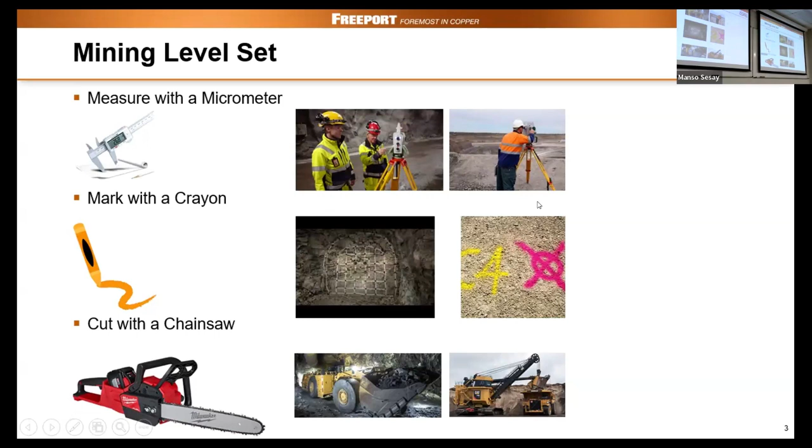In mining, we measure with the micrometer, we mark with the crayon, we cut with the chainsaw. It's very true, but it's really interesting because looking back on it, some of him sharing that with me was a little bit of his frustration, right? We go out in the field, there's such precision in what we do, and then you turn around and see this huge shovel just basically plowing through, and there's really not a whole lot of precision to that.

So fast forward to where we're at today. I think it's important to highlight that mining is actually coming from a position of strength today. We've come a long way, right? Our mines are safer, more productive, more cost efficient. When you think about the relationship with the workforce, we have as good a relationship with the workforce as we ever have before. The level of engagement and collaboration is at its highest level that we've seen. So certainly for us at Freeport, we lean a lot on our workforce to help us solve some of the issues and challenges that we have.

Moving on, when you think about technology, you've heard the old adage around work smarter, not harder. But there's a lot of technology that we deploy in the field. And when you think about decarbonization going forward, we're going to be relying pretty heavily on technology.

And then along the way, even environmental stewardship. So now when you think about these key priorities of safety, environmental, cost, production, now we're layering in this whole decarbonization, and I'll get into some of that detail with all of you.

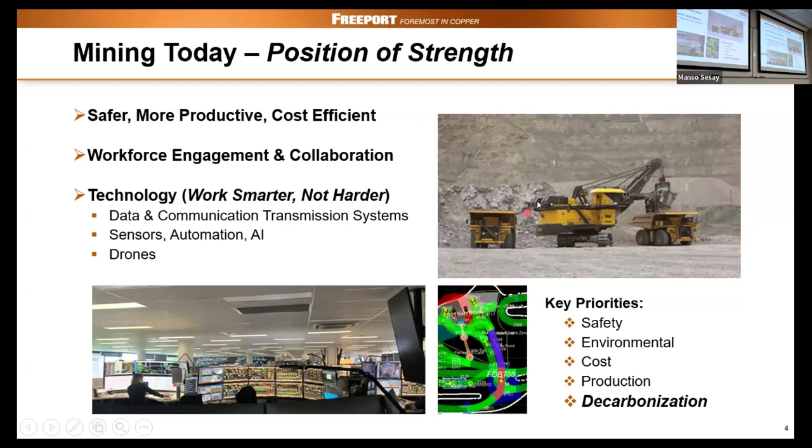The group that I work in within Freeport is called Sustainable Mining. We've all heard the word sustainable, it has a lot of meanings. Certainly for us, it's beyond even just decarbonization. Sustainability is, for us, how do we sustain our mine plan? How do we sustain our assets? How do we sustain the workforce? It's really, really key to our business, and certainly for other companies as well.

I wanted to highlight here, when you think about sustainability, this is our Miami mine. Back in 1993, we purchased this 4100 shovel. It went through a life cycle. We rebuilt it, redeployed it to our Morenci mine. It's been operating at Morenci, and then in late 2023, we actually rebuilt it again. So we have a shovel that's on its third life, basically running 250,000 hours. Rather than replace the assets, we actually have a pretty good program where we rebuild those assets to basically brand new. We've done a lot of activities since 2006.

This is a key part of our business, it's part of our cost profile. Rather than spend $30 million on a brand new shovel, you can rebuild it for half the price. It actually operates and is reliable, just as good as new.

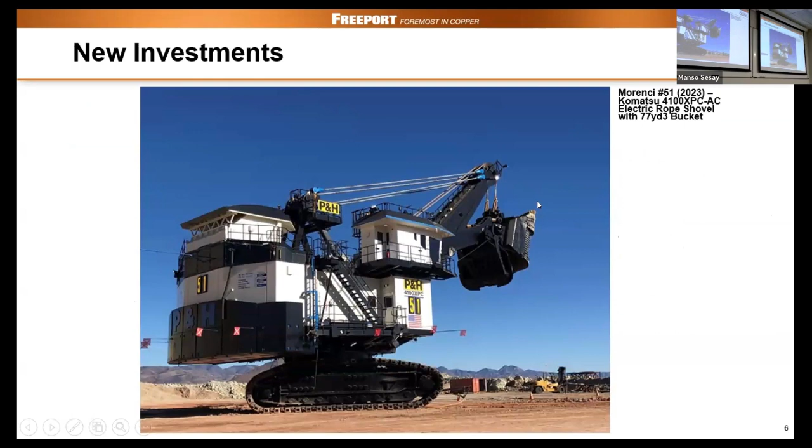And at the same time, we're also making new investments. This is actually our latest addition, a brand new 4100 XPC AC shovel to the Morenci mine. So it's not all about rebuilding assets, we're also bringing in new assets as well.

But you also have what they call scope 2, and scope 2 is you bring in electricity into the operation. You've got to run your mills, you've got to run other facilities. Where does that electricity come from? Is it renewable? Is it non-renewable? Non-renewable electricity, of course, can create greenhouse gas emissions. It's no different than the diesel consumption producing greenhouse gas emissions. You can have non-renewable coming from coal, gas.

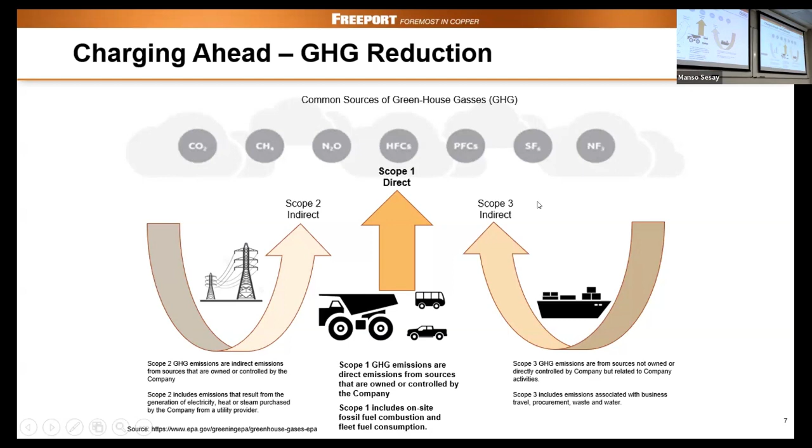An example of renewable would be solar, windmills, etc. This one over here, scope 3, is actually more on the supply chain side, further down the road, and that's something the industry is pulling together as we speak. I wanted to give you some context on what scope 1, 2, and 3 is, but I'm going to focus on the one here in the middle.

For Freeport, we've actually set some targets. One of the things I wanted to go over is how we measure our greenhouse gas reduction, in terms of copper intensity. Copper intensity is a measurement of how many metric tons of CO2 you're producing, divided by how many metric tons, in our case, copper that we're producing. So basically for every metric ton of copper, how much CO2 are we creating? This is referred to as copper intensity.

If you look at Freeport Indonesia, they actually have a separate target of 30%. But by 2050, as a company, we plan to be net zero on our greenhouse gas emissions.

We call that an aspirational goal, and the reason why that's aspirational is a lot of the technologies don't yet exist. And if they do exist, they're not yet scaled for our application.

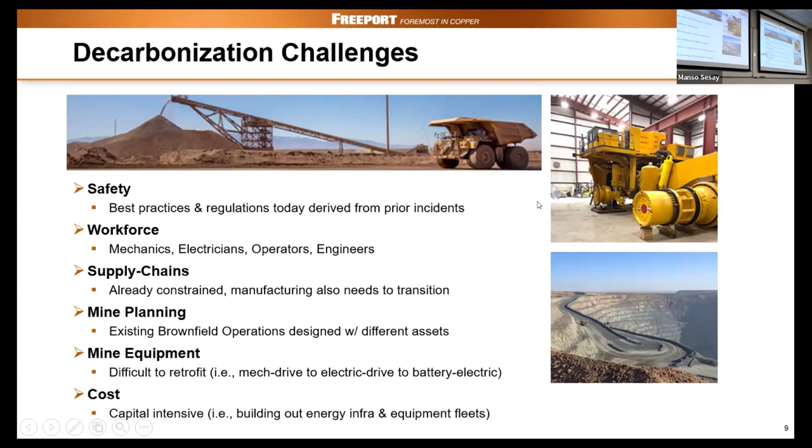When I showed you this previous slide, our business model today is all about taking these existing assets and we keep rebuilding them. So a $5 million truck brand new, I run about 500 of them. I'm going to rebuild them for 2.5 million, cycle after cycle after cycle.

Well, if I can't retrofit those trucks, in the future those 500 trucks need to be converted to the next generation haulage truck. So take 500 trucks times $10 million - just haulage alone, that's a $5 billion investment just in the haul trucks alone. That doesn't include all the enabling technology that goes with it.

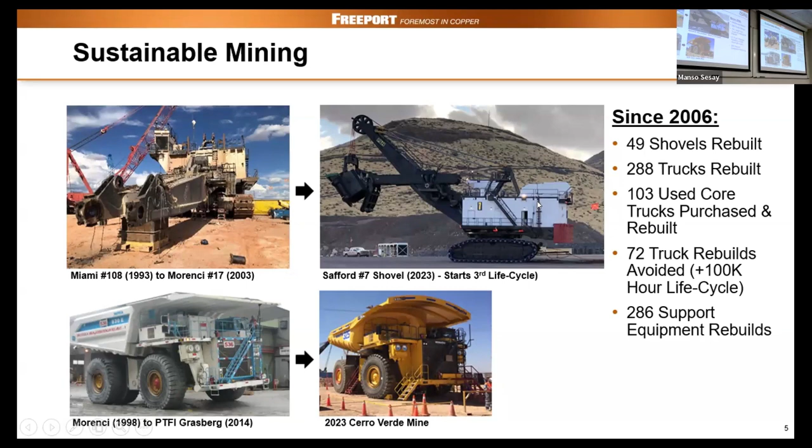So this is part of what I'm sharing, is that it's highly disruptive. Again, it's the right thing to do, but it's highly disruptive. And so when you think about just general business, you're sustaining the business, you have to reinvest in the business.

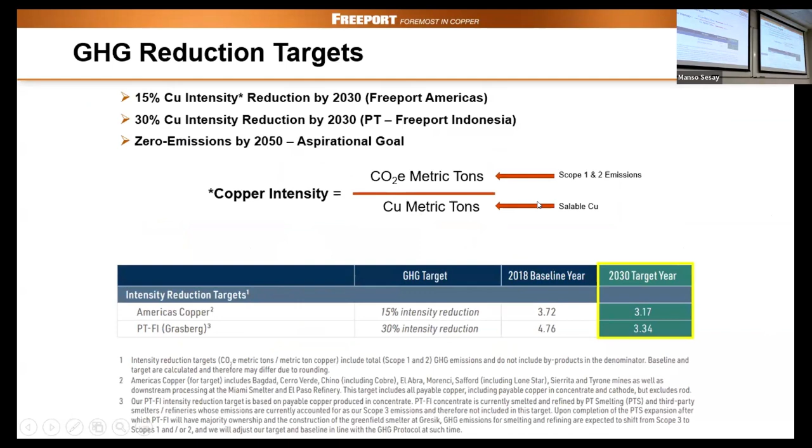There's a lot of work that goes into tailings dam management. As pits get deeper, more mature, those ore bodies get mined out, you have to invest in new projects. So everybody's competing for this capital. And now with this decarbonization, we have this new competitor for capital.

So another area I want to highlight, this is part of the challenges. When you think about copper, of course, copper is really important to us. That's our primary focus, and we're excited about the green transition. Copper is going to benefit immensely from this transition.

But when you think about where we stand today, these figures are based on an IEA study from back in 2021. We're roughly at 25 million metric tons of copper production per year today. The projection, and again this is independent, is that by the year 2035, you're going to need double the copper production that's being produced today.

So this is going to pose some really big challenges for society as a whole, but certainly as a mine operator. We're trying to spend money reinvesting in a new fleet of haul trucks that are zero emission, but at the same time I'm competing because I also need to reinvest in expanding my existing operations, exploration, developing new projects. So there's a lot going on. It's not just a Freeport issue, it's actually an industry-wide issue. I'm talking about copper here, but copper is no different than all the other commodities out there.

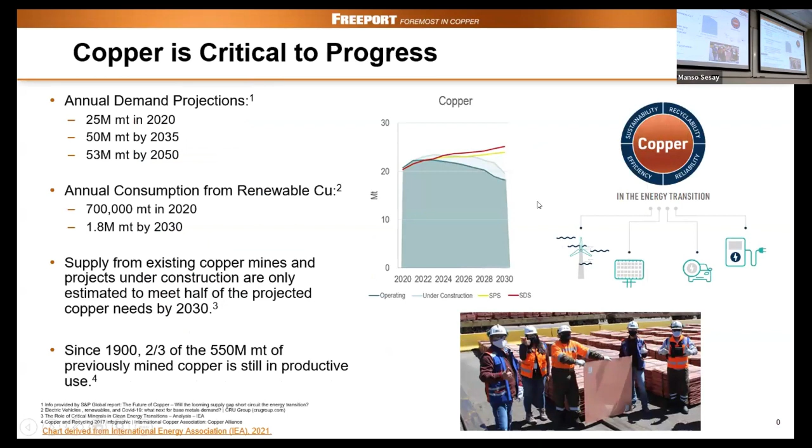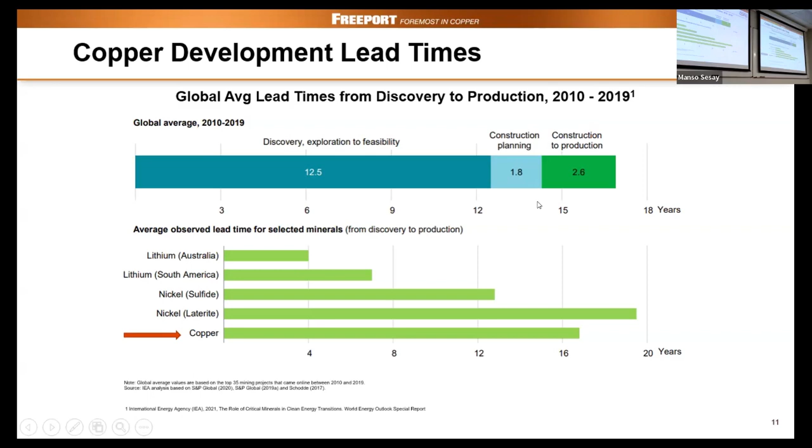And I think that's worth noting. Again, it's not just about copper, but just think about the demand now on lithium and nickel and cobalt. The list goes on.

So what we're trying to do now is, if I have a net zero truck and I'm not using diesel, I'm going to be loaded at the shovel. That's where you hear a lot about battery - if I have a battery that can allow that truck to operate, that's what we want to do, around the battery propulsion. Then you hear a lot more about trolley assist - how can I propel the machine while at the same time recharging that battery? And then there's times when I'm not exposed to dynamic energy transfer, which is what trolley is, and now I'm back to using my battery again.

Cases where you have a downhill haul, like today's trucks, there's all this regenerative energy, and they end up blowing that energy off - they dissipate it from the truck. So now it's like, well, maybe we can take that energy and put it back into the battery. So really what we're trying to solve is, how do I take an existing haul truck today that I'm basically just running these cycles, the mining cycle, and now I don't have diesel, but I've got to keep those trucks running. That's when you think about these enabling technologies - the technologies of the battery, technologies of the dynamic energy transfer, leveraging regenerative opportunities.

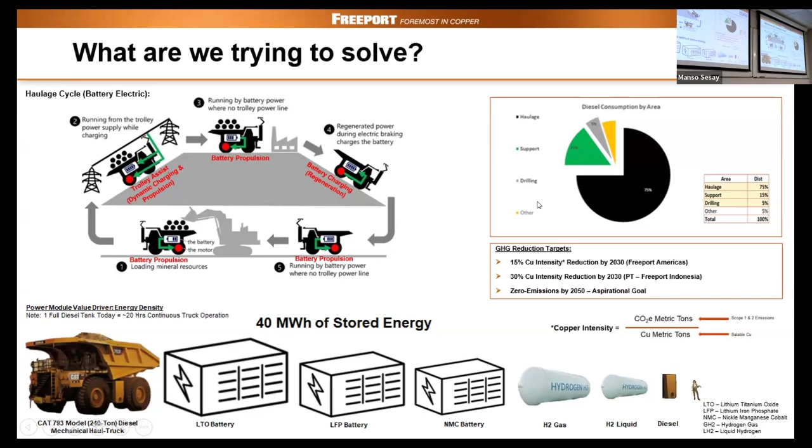So you go through these different areas like, okay, will these actually lower my scope 1 emissions? Yep, they all will lower your scope 1 emissions. Certainly there's some zero emission solutions over here.

Availability at scale. So a haul truck, if you want to run a haul truck today for a 24-hour period, you need 1,000 kilograms of hydrogen. So if I have a fleet of 50 trucks, I need 50,000 kilograms of hydrogen per day to run a fleet of 50 trucks at a mine. I have 500 trucks. Where am I going to get 500,000 kilograms of hydrogen? It doesn't exist. And we're just Freeport.

Throw in the Newmonts, right? Throw in the BHPs, the Rios, FMGs. So the supply is not there. So you can kind of go down here. There's obviously cost impacts. Again, mechanical drive. Those components are not configurable to actually running trolley assist, battery, and hydrogen fuel cell.

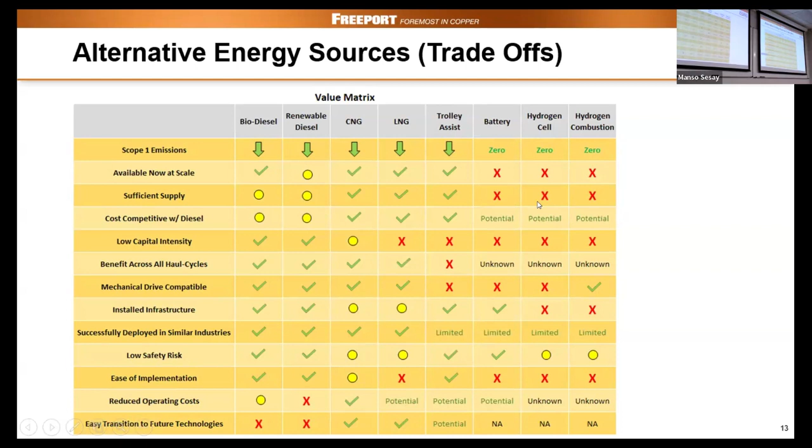So yeah, so these are just some of the exercises that we've gone through as a company. Because one of the things I will say is, every company is a little different, but one of the first things you need to do is really understand what's your profile.

And then you think about hydrogen, you're going from wire to gas, back to wire. So that same 100% renewable electricity, when you go through all the conversion, you have the losses across, you're only actually 22% efficient.

Depending on how you produce your hydrogen, a common way is through electrolysis. We operate in the southwestern US, where water is kind of scarce. So if we're going to set up hydrogen production plants, where are we going to get the water?

And on top of that, I need all this energy, and I need a lot of it, because at the end I'm only going to get 22% efficiency out of producing that. So part of this is explaining the complexities of what's going on, what we're trying to solve, and how we get there. But the laws of thermodynamics don't lie. They are what they are. We'll see how that progresses going forward.

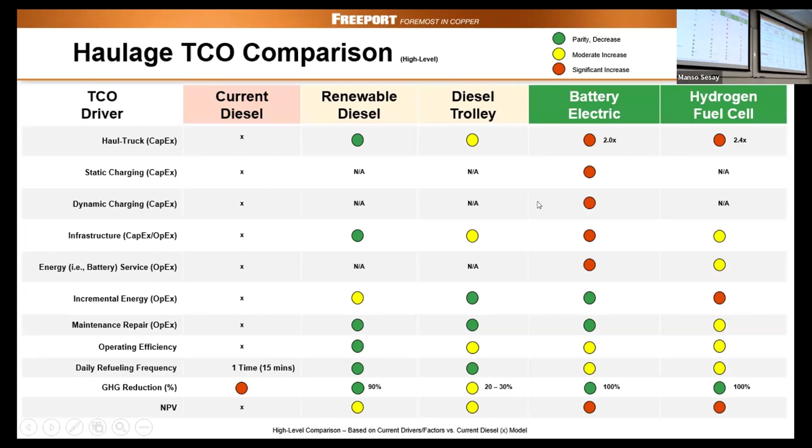So I've talked about this, current mine profile versus future mine profile. There's definitely a really good exercise around strengths and weaknesses. I mentioned earlier, we're a shovel and truck company. Our mindset, my training in mine engineering, has been around shovels and trucks. I'm very comfortable with shovels and trucks. But that may not be the solution in the future. When you think about a weakness for Freeport, we've got a bunch of mine engineers who are all truck and shovel guys. And the reality is we've got to shift away from that.

You hear the references around trying to put a square peg in a circular hole, or vice versa. It's not one size fits all. There's not going to be any kind of silver bullet. A lot of what we talk about in our business is beware of the shiny objects. When we started down this path a couple of years ago, you had a channel of solutions about this wide, and everybody had all these great ideas. Well, two years later, a lot of those ideas have fallen off because they just weren't feasible or the timing wasn't there. That channel's gotten a lot smaller. But it's really easy when you get these channels of all these ideas to get distracted. That's what we mean about avoiding the shiny objects.

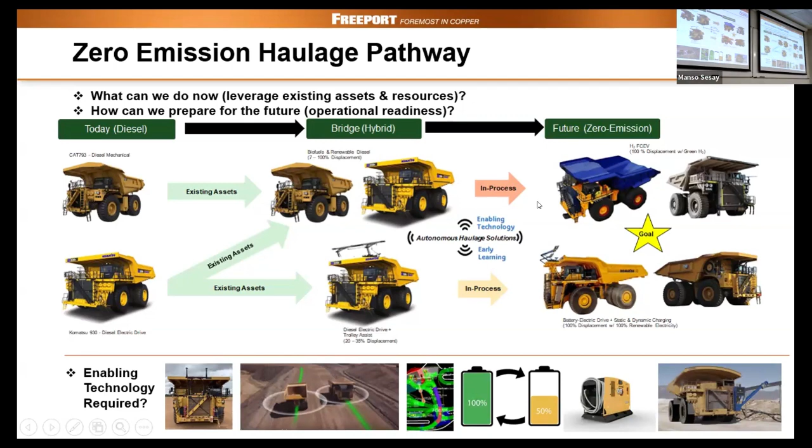I won't get into a lot of detail here, but if you take the information on the last few slides, you figure out, okay, this pathway we're on from where we're at today to the future. We've got our 2030 target, you have your 2050 net zero. What are some of the things we can do?

We actually have projects around static and dynamic charging. There's a lot of collaboration going on—I'll talk about that in a second with Cat and Komatsu specifically. Again, that's around how we prepare for the future.

We actually have a separate power group within the company that's working on how we take non-renewable electricity and convert it to renewable—so move away from gas, coal, over to wind, solar, nuclear. And this scope 3 is actually under development as an industry; they haven't quite tackled that yet.

So this is really where the priorities are. But this gives you an idea, as a company, for myself and my team, these are the activities we're involved in right now. Again, what can I do with existing assets and how can I prepare for the future? So focusing on the things you can do and the things you can control.

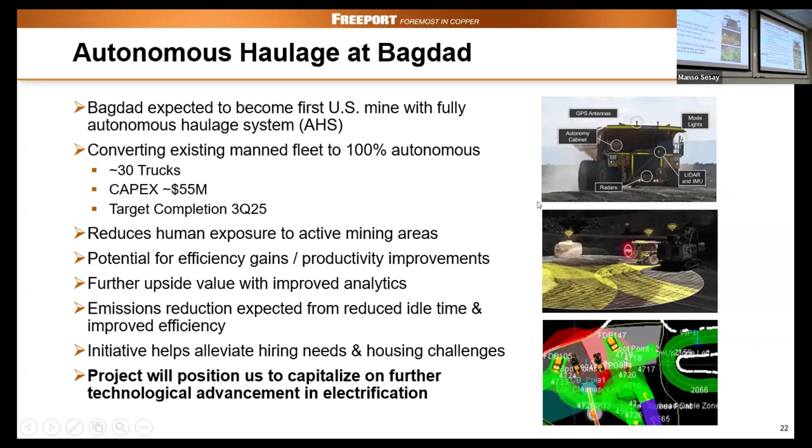And so that's based on today. But this is actually now going to become a blueprint, because in the future, when we're running a battery electric truck like this one here, in order to keep this truck moving 100% of the time, how big of a battery system do we put on that truck? And that battery is only going to last so long because I still got to carry 240 tons of material. And I'll just tell you guys, the batteries for these trucks are in the 15 to 20 ton range.

So if I'm putting 15, 20 tons on that truck, ideally, I can't have 240 tons. Maybe it's going to have to drop to 225 or 220. Now, remember when I said you might have a fleet of 50 trucks and now I'm going to have to start running 60 trucks? Well, if I have a payload of 220 instead of 240, I'm less productive. I have to make it up. So you can see why everything is so complex.

But part of this is this whole dynamic energy transfer. You'll be hearing more about that. Trolley assist has been around for a while, but how do I actually recharge that truck and propel it at the same time? That's some of that other technology. So with that being said, that's all I got.

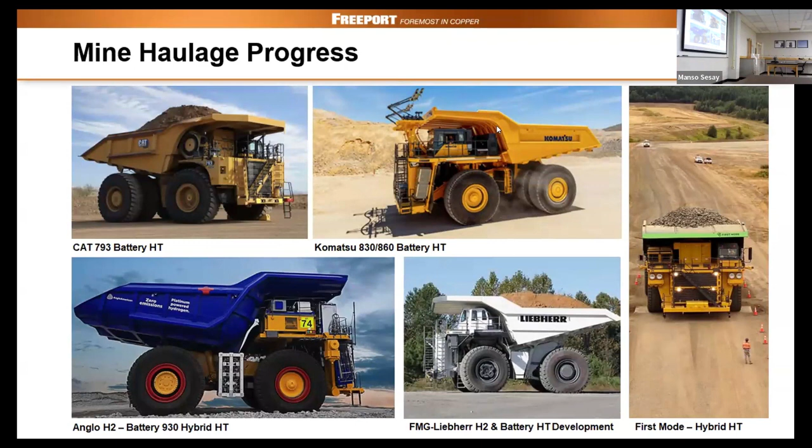Have you thought about setting up a hackathon type competition to look at these? Freeport has done this several times here. It's becoming very popular with a lot of companies who get all of these crazy out of the box ideas and give it to the engineers to design. It would be very helpful.